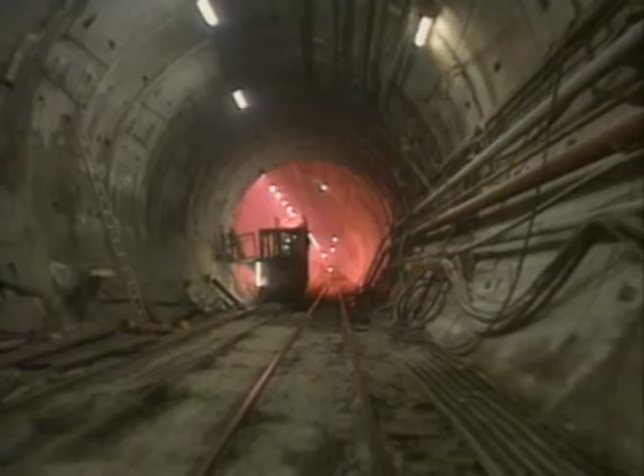Deep beneath the English Channel, one of the most ambitious engineering projects ever attempted is about to begin. Using Earth-eating robotic monsters, 13,000 workers are about to embark upon an epic quest to build the longest undersea railway tunnel in the world. This historic journey will push the limits of technology and human determination to the breaking point. Some workers will not survive. But the creation of the Eurotunnel is a story of triumph, one of this century's greatest superstructures.

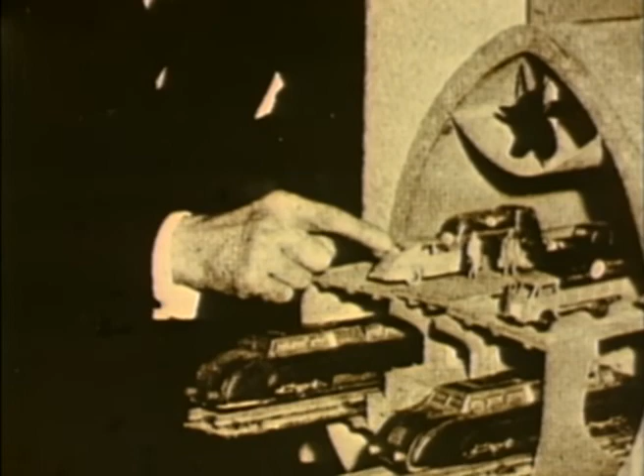Ever since the Ice Age ripped them apart 10,000 years ago, a small finger of ocean, the English Channel, has been the only path between England and Europe. Throughout history, countless lives have been lost trying to cross this treacherous body of water. For centuries, amateur designers and skilled engineers alike have tried and failed to create a safe, permanent link. The first channel tunnel design, if you can call it a design, was in 1802. But at that time, the technology was so limited that really it was science fiction.

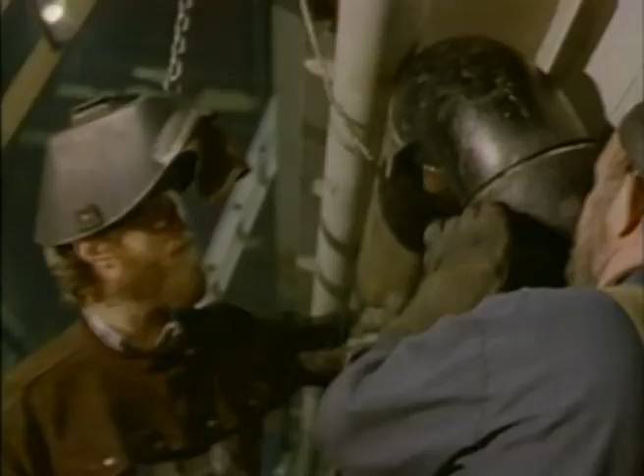But by the end of the 20th century, the line separating technology and science fiction is rapidly disappearing. It is now possible to create machines the size of large buildings, machines that can literally move mountains. Inside factories like these, engineers begin experimenting with space-age technologies to take humans into new and potentially dangerous territories. Soon, an age-old question is asked once more. Can a tunnel be created under the English Channel?

But does England herself even want such a passageway? From the days of Camelot to the age of Churchill, the Channel's cold, choppy waters formed an imposing barrier between the monarchy and its enemies. Would-be conquerors from Napoleon to Hitler developed plans of how they could first defeat the English Channel and then England itself. Ironically, during World War II, Adolf Hitler developed a plan to dig a tunnel near the captured French town of Calais, site of the modern-day French Eurotunnel station.

It was a threat the Allied forces took seriously. Bomber pilots were requested to report any plumes of grey material in the channel, and they actually established soldiers along the coast here with listening devices trying to detect any sounds of tunneling. But with the defeat of Germany in World War II, Europe entered a new era. The sounds of war were replaced by the sounds of commerce.

By 1986, one-time rivals England and France decide the Channel has become an economic barrier, an obstacle that must be eliminated. To achieve this, the French and British governments dedicate themselves to the task of building a modern marvel, the world's most technologically advanced undersea tunnel. Engineers and business people alike dream of high-speed rail trains traveling beneath the English Channel, carrying the citizens of a united Europe into newfound economic opportunity.

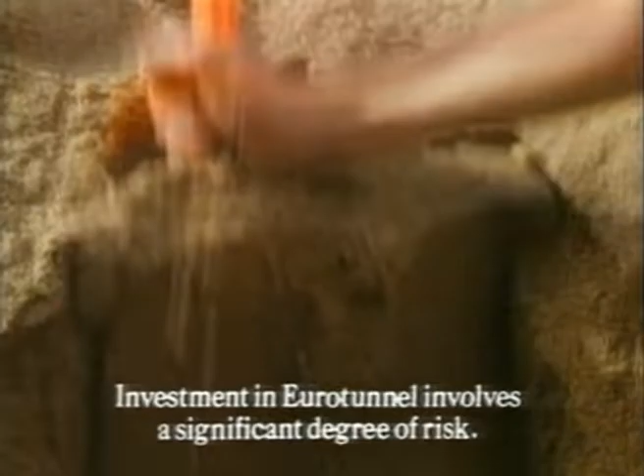For as long as we can all remember, people have dreamed of a channel tunnel. As this ad, seeking Eurotunnel investors, points out, the project was financed solely by private investment, with an original price tag of over $10 billion. This made it very different from other large engineering projects of this century, like New York City's Lincoln Tunnel, which was government-funded. Ultimately, Eurotunnel had to answer to its shareholders.

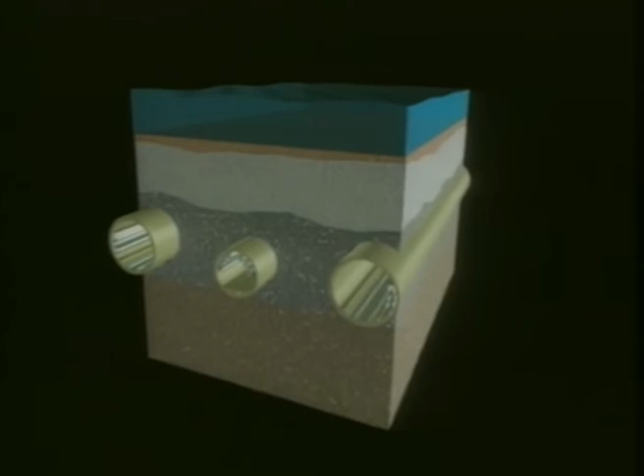But despite the private backing, there was much public opposition, especially on the British side. Some opponents were concerned about the environmental impact of the project, while others didn't want to surrender England's status as a proud island empire. The project's decision-making body, a consortium of 10 companies called Transmanche Limited, or TML, is undaunted. They plan a design of 3 parallel tube-like tunnels. When finished, these massive tunnels will form a railway loop between England and France.

Engineers envision a system that will carry thousands of passengers and hundreds of tons of freight each day on this circular 30-minute trip. Of the 35 miles between the French terminal at Calais and the British terminal at Folkestone, 24 will be undersea. No other project has ever attempted to tunnel this far in such a hostile environment. There are lots of problems, technical problems. How will a car move inside the tunnel? What kind of trucks can I transport? You know, all the variety of things.

As the project begins in late 1986, all of these questions remain. But before issues regarding the tunnel's operation can be addressed, the most daunting and obvious problem must first be solved. A machine that can chew through more than 30 miles of solid rock, hundreds of feet below the sea, doesn't exist. It will have to be created.

Thousands of miles from the English Channel, on the outskirts of Seattle, Washington, a solution is being forged of iron and steel. Here at the Robbins Company, a firm specializing in heavy mining and tunneling equipment, the next breed of super machines is being created. In this colossal factory is a mechanical beast that dwarfs its creators. It's called a tunnel boring machine, or TBM.

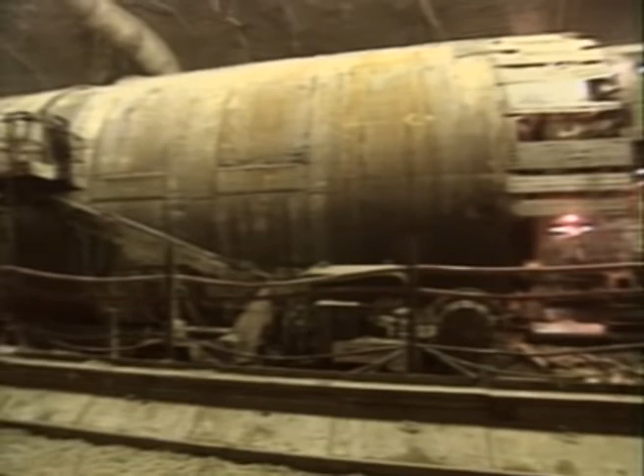When finished, this giant snake-like earth mover will be over 800 feet long and weigh over 1,500 tons. Its rotating head, almost 30 feet in diameter, consists of hundreds of cutting edges made from tungsten carbide, one of the hardest materials known to man. These will be the teeth of this mechanical monster, the cutting force it will use to chew through the earth below the channel.

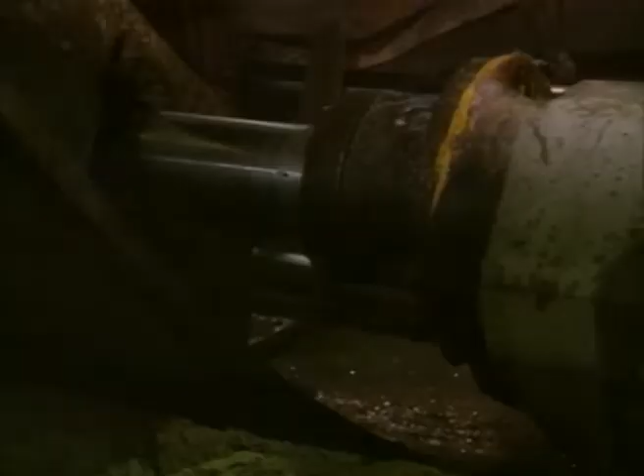Pushing the machine forward is a series of powerful hydraulic devices called rams, which will drive the cutting head through the rock. The millions of tons of excess rock it will dig up, called spoil, will be carried out on conveyor belts through the TBM service train attached to the cutting head. The challenge of carving tunnels through solid rock has always pushed the boundaries of our engineering and manufacturing skill. Even today, it requires a rare balance of brain and brawn.

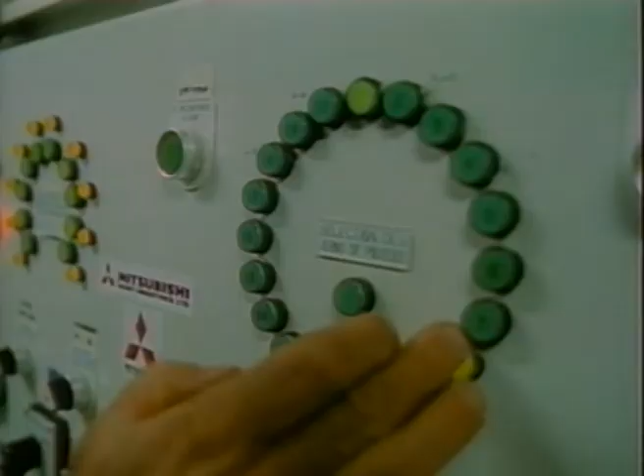When large-scale projects like the Los Angeles Aqueduct System were being created in the 1930s, tunneling technology was in its infancy. Today, the Robbins Company will replace blasts of dynamite with a computerized mechanical marvel of which the early pioneers could only dream. But the danger these modern miners face will also be unparalleled.

At its deepest point, the tunnel will be 246 feet below the seabed. During construction, if their boring efforts create a crack in the tunnel or cause a leak, the force of the incoming water will be equivalent to over 7,000 tons of falling weight. Man and machine would be crushed in an instant. At the Robbins Company, frightening scenarios like these must be addressed.

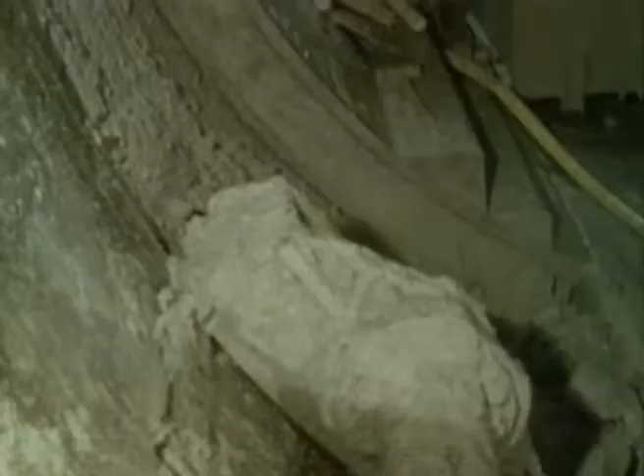Project organizers selected the tunnel's route precisely because it goes through a layer of chalk called marl, which is well suited to their tunneling efforts. It is also the last remnants of the original land bridge that once connected England and France over 10,000 years ago. While this chalk is ideal for tunneling on the British side, the situation on the French side of the channel is far more treacherous. Here, the seabed is riddled with faults and fissures, conditions that could lead to the deadly accidents engineers must try to prevent.

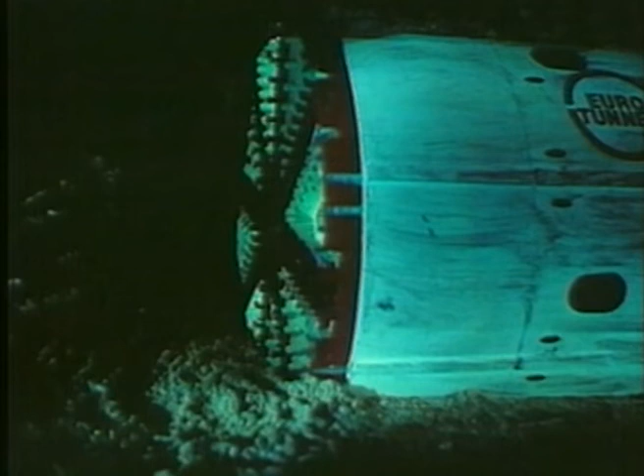Of the 11 TBMs that will be created for this mission, the machine that will be used on the French side faces the most difficult job. Working at greater depths, in parts of the seabed that are far less stable than the British side, this undersea giant will have to withstand pressures twice as intense as any tunneling machine has ever experienced. So engineers decide to create a special TBM that is part boring machine, part submarine. When finished, it will be able to withstand the same amount of undersea pressure as a World War II sub.

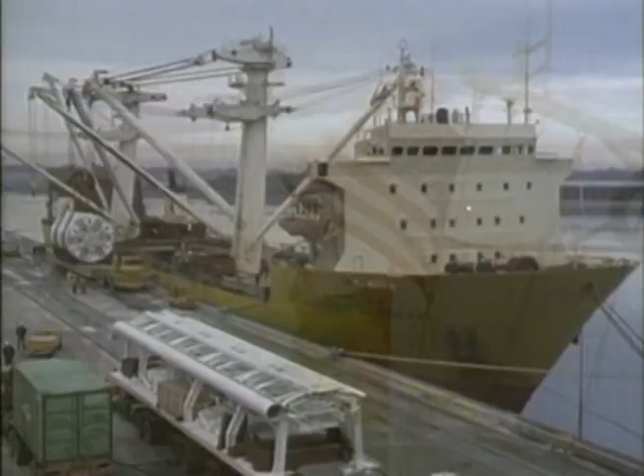Finally, the technology behind the dream of reuniting the European continent seems to be in place. And while the project will ultimately link England and France, the massive construction process will be an international effort. Companies from Germany to Japan will add their technologies to the mix, making the Eurotunnel a truly global undertaking. While this international force rallies to overcome the physical obstacles of the channel, there are other challenges already mounting. Namely, the race to complete the tunnel on time and on budget.

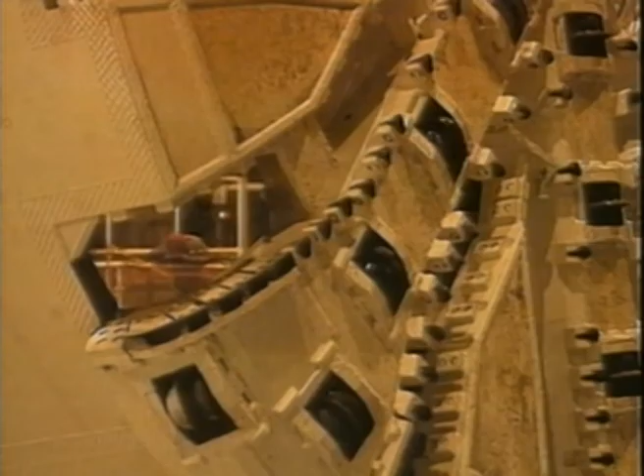It is now December 1987. This is where the Eurotunnel begins. Two huge shafts at Sangatte, France, and Shakespeare Cliff in England. Too enormous to be delivered to the site as complete machines, the first TBMs are lowered piece by piece into the darkness of the shafts 200 feet below. Going with them are the workers, the men behind the machines. They too are descending into the unknown, taking the first steps of an epic journey.

As the first work begins and the light of day slowly disappears, there is an air of hope, expectation, and much uncertainty. While extraordinary safety measures have been taken to protect the workers, it remains a dangerous world. And for some, the greatest civil engineering project of the 20th century will carry the ultimate price tag.

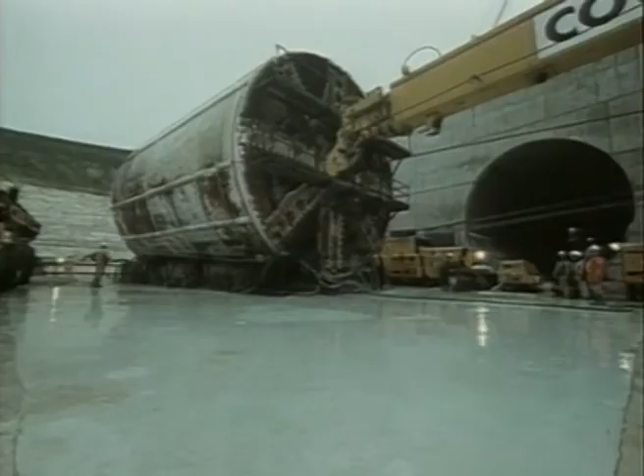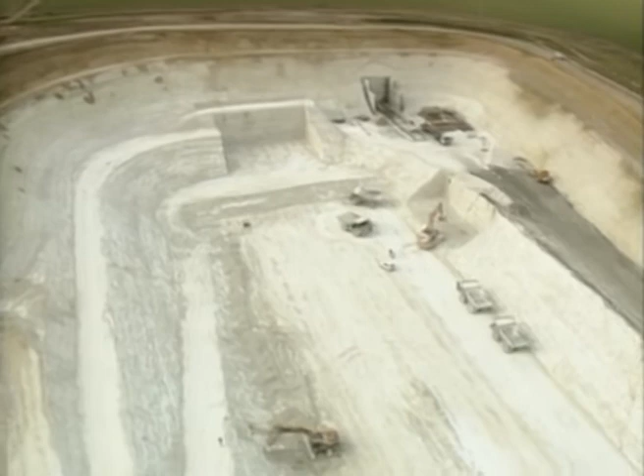As giant mechanical earth eaters are given a final check before being lowered to their work site hundreds of feet below the ground, one of this century's most ambitious engineering projects is underway. The creation of an undersea railway that will link England and France begins here in Sangatte, France, and here at Britain's Shakespeare Cliff, near the site of the future Folkestone Terminal. What officials hope will someday be the world's premier railway system is now just a hole beneath the earth. The race is on.

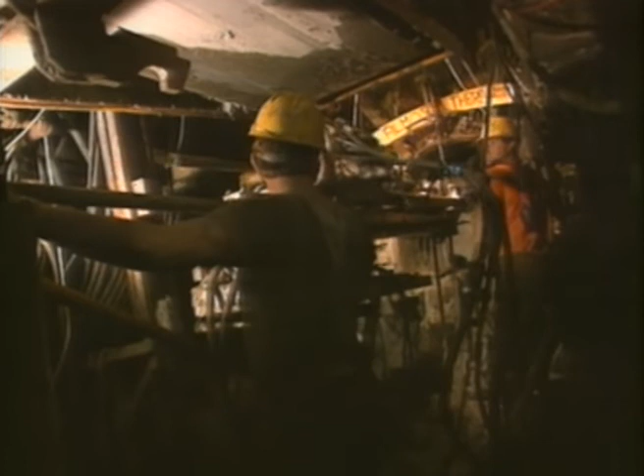Compounding the awesome challenge of the actual tunneling operation is a human challenge. British and French workers, once bitter rivals, must now learn to work together. Once they reach the dark and dangerous caverns deep below the earth, there can be no room for cultural misunderstandings.

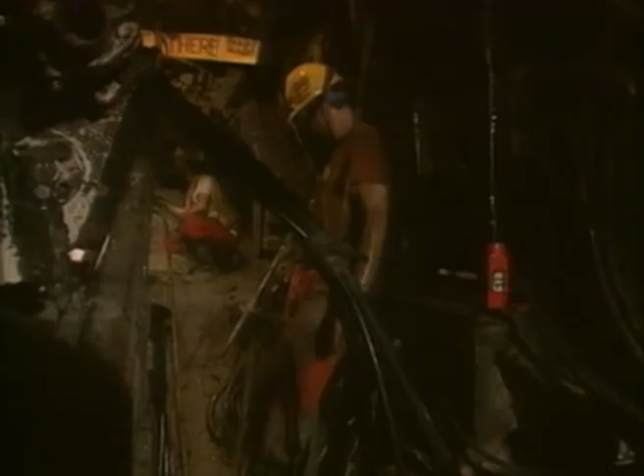A French engineer is trained to make a plan. They can't start work unless they can see what there is to be done, see where their task fits into the whole thing, and see how it's all going to be organized as it goes along. No such thing in the British culture. British culture is to sit down and say, now what have we got to do, chaps? And sort out who's going to do what and set to work.

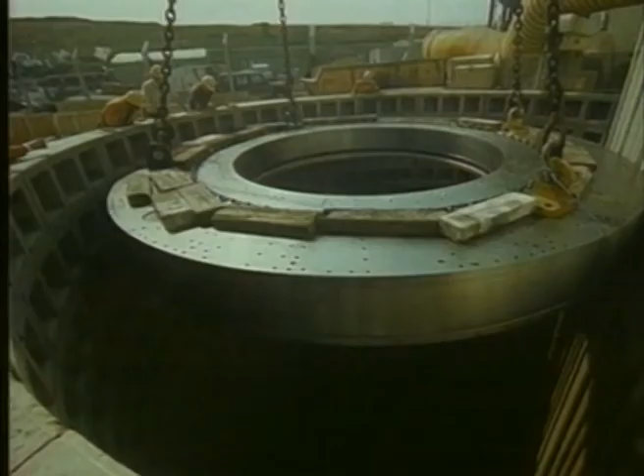One of the first problems they face is the assembly of the giant tunnel boring machines, which the workers christen the moles. Even the smallest machine takes months to build and costs several millions of dollars. The largest of these subterranean titans weighs 1,500 tons. Because of their enormous size and weight, the TBMs must be assembled on site, which in this case is far below the earth.

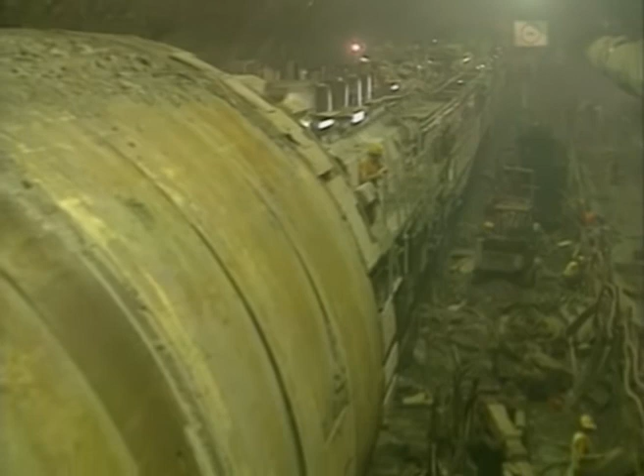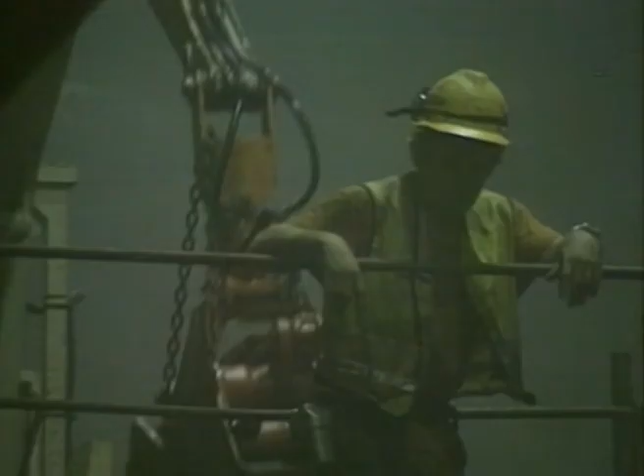The actual cutting head of the TBM is just the tip of its immense body. Attached to it is the service train, a multi-car train system that carries the hydraulic power to drive the TBMs forward. When connected to the cutting head, each service train is a staggering 850 feet long. One of the service train's main functions is to be a conduit for the removal of millions of tons of rock and sediment these mechanical moles will dig up.

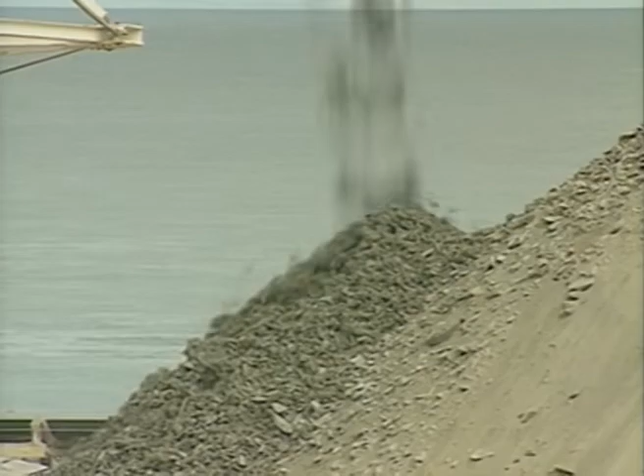The debris will be carried by conveyor belt through the service train to a supply train and back, and finally to disposal facilities in England and France. The removal of the spoil is a major challenge. When operating at full speed, engineers estimate the TBMs will cut through 750 feet of rock per day, removing 2,400 tons of waste per hour. When the project is finished, the total amount of rock removed would fill a major football stadium 13 times.

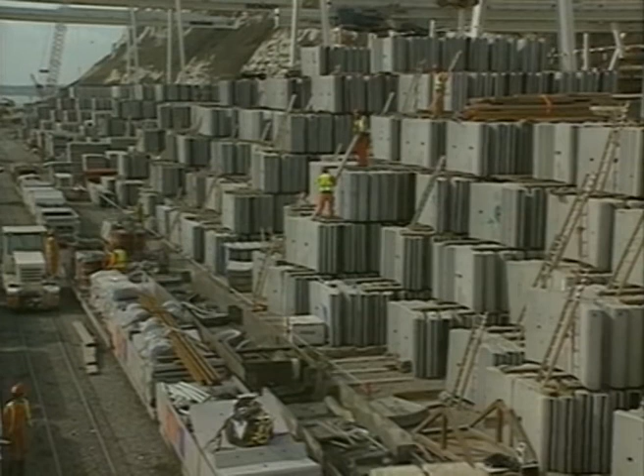But equally important as taking material out of the tunnel is the challenge of getting materials in. And one of the most crucial building blocks at this underground work site are the 500,000 concrete slabs which will line the tunnel walls. Because these concrete rings will provide a life-saving barrier between passengers and the churning English Channel above them, their construction is of utmost importance. Special factories are built in England and France to manufacture these vital sections.

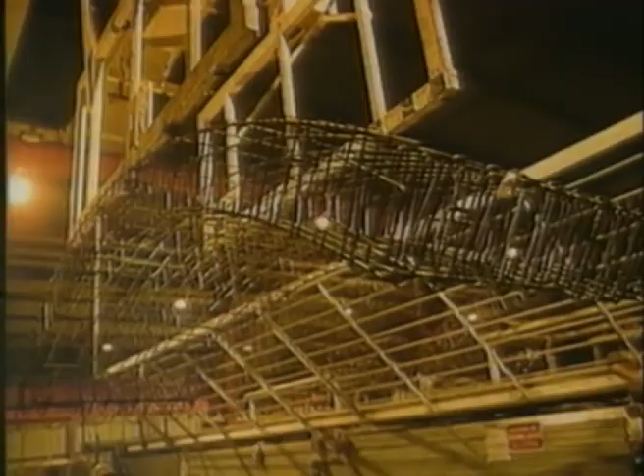Each ring is made of specially reinforced concrete, even stronger than the concrete used in nuclear power plants. It is also reinforced with a framework of steel rods for extra resistance. This is necessary because the savage ocean pressure that will bear down on the tunnel walls is equivalent to 12 atmospheres, or 12 times the pressure we feel on the surface. No human could survive under such immense force.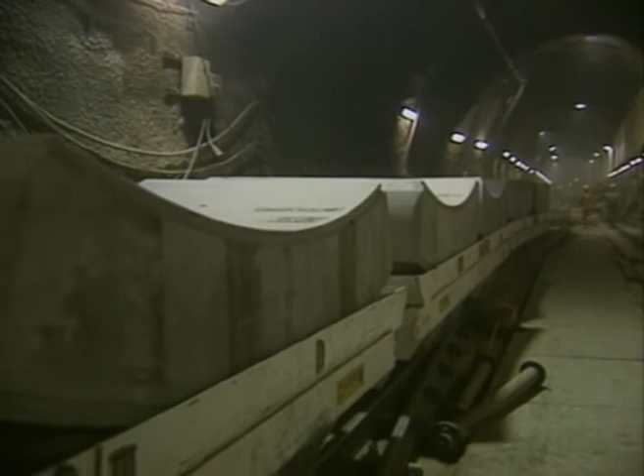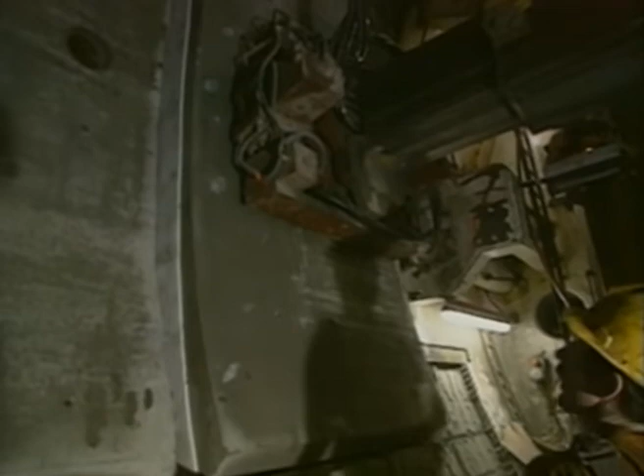Once the rings are finished, they are transported by narrow gauge railway to the TBMs in the tunnel and brought up through the service train. Then, a remarkable display of mechanical symphony takes place. As the spinning head of the machine claws its way through the rock, operators using giant cranes create the tunnel walls right behind them. After being fitted into place with incredible precision, a gap of only 3/4 of an inch remains between each section. This tiny space is then sealed with a cement grout, and another piece of the tunnel wall is complete. When finished, each ring of the tunnel will weigh 40 tons.

But just as the skeleton of the tunnel is beginning to take shape, the project suddenly seems in danger of falling apart. It is now 1988. The British and French teams are starting with the middle service tunnel, drilling towards each other to meet in the middle of the channel. But by May, the giant tunneling machines begin to break down.

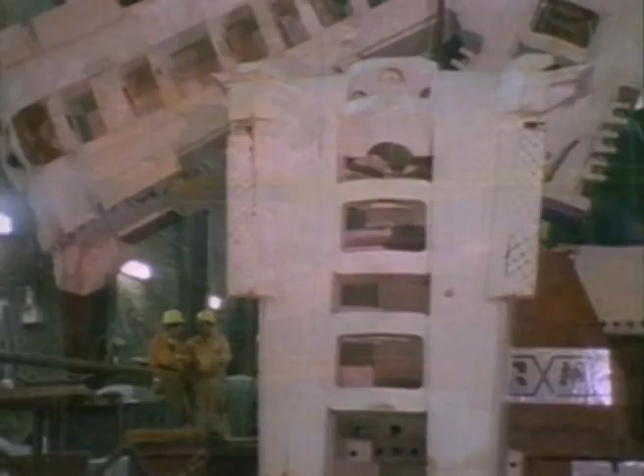It was designed to operate at pressures that no machine had ever operated before. It was strictly a prototype as a result of the fact that it was so complex and nothing like it had ever been built. It had all kinds of troubles. Practically everything important on the machine failed or broke at one time or another shortly after we installed the machine.

On the French side, the TBMs are encountering precisely the scenario engineers feared the most: hidden faults and fissures in the seabed. On the other side of these cracks lie the awesome forces of the English Channel. It was technically very difficult because of the water pressure that we had to work in. As the machine bored forward, it bored right through faults that were filled with seawater, connected directly to the ocean.

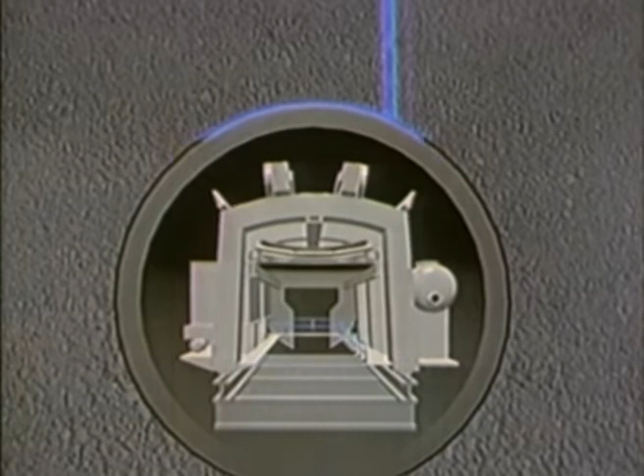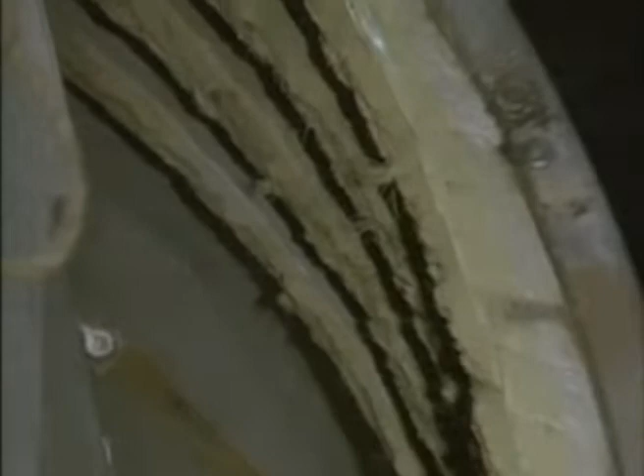Waterproofing measures designed to protect the TBM's delicate electronic equipment from the seawater fail, stopping the giant machine in its tracks. Then, as engineers scramble to repair the electrical problem, another even larger problem develops. This is the seal we intend to use. It's a wire brush type seal. The ring of watertight seals providing a life-saving barrier between the TBM and the tunnel walls also begin to fail. Again, victims of saltwater corrosion.

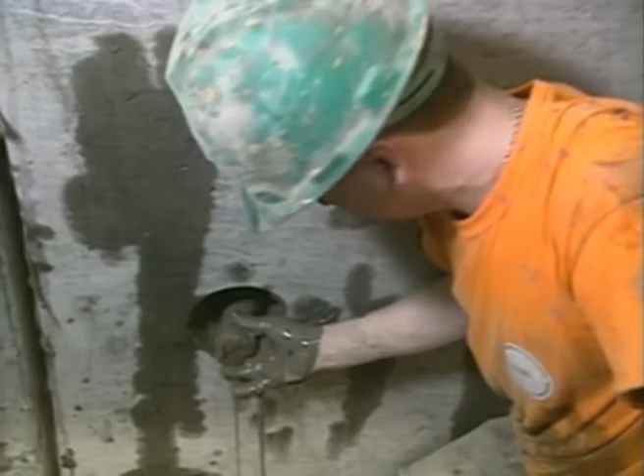Engineers need a solution, and fast. The corroded brush-like lining seals are replaced. Then, a mixture of paper and special grease is applied to the brushes. When this coating comes in contact with seawater, the paper particles expand and create a permanent, watertight bond between the segments. The TBM is once again waterproof.

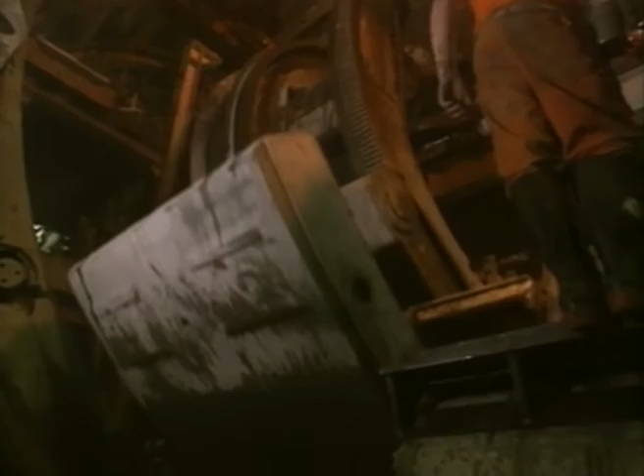But to Robbins Company President Richard Robbins, the tunnel wall seemed far more secure than the legal agreement he is working under. Soon he is forced into a desperate personal gamble. The French contractor knew that we had designed a prototype machine that we didn't really understand exactly what it was going to cost us to build. So he built into the job some interesting incentives that if we met certain project construction points along the tunnel by certain dates, we would earn bonuses. But it was so bad in the early stages that I was really almost betting the entire company that we would succeed. So it was a big risk for a small company like ours.

But it isn't just contractors like the Robbins Company who are gambling their future. Because the entire project is privately funded, Eurotunnel officials must hit their own deadlines to continue to receive funding. With each new delay, the entire fate of the Eurotunnel lies in the balance. The one thing we all understood was that if we stopped, it would be very hard to restart. The relationship with the banks, the problems with the contractors, the difficulties with the governments, or just plain organizational difficulties of whatever kind, would very probably bring an end to the project.

Finally, engineers are able to redesign the mechanical flaws in the French TBM and move ahead. But they are now 9 months behind schedule. To make up the time, both the British team and the French team must stay on course. But how will these mole-like machines, tunneling towards each other from opposite directions, maintain such a specific course? They are far too deep below the Earth for high-tech satellite mapping to be of any use. And even the slightest deviation in their course, a fraction of 1 degree, will mean they fail to meet up under the channel.

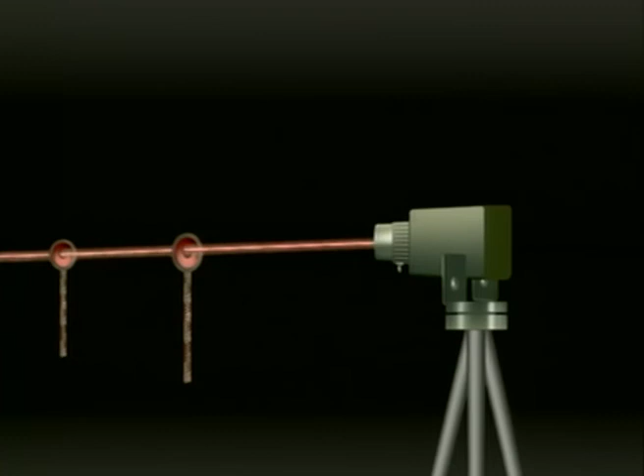To remain on track, tunnel engineers use a space-age laser beam guidance system. Here, a red laser emits a beam from behind the cutting head. As it sends a beam of light forward, it hits various control points fixed to the tunnel wall before striking a special target on the rear of the cutting head. These control points feed information provided from the laser straight into the machine's onboard computer. From the TBM control cabin, operators can now adjust the hydraulic rams that thrust the TBM forward and keep it precisely on the right course.

But even if the two machines do stay on course, the complex plan for after they meet has never been tried before. As the French and British TBMs tunnel towards each other, they will reach a designated point where they will stop.

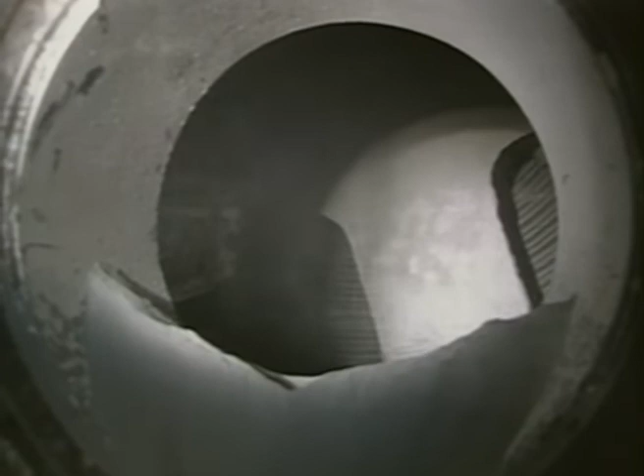They will now be a mere 100 yards apart. At that point, a long steel probe will be sent through to determine if they have been truly on course. If so, more conventional equipment will finish the relatively short distance that remains. But if the two machines are off course, it will mean yet another delay while engineers try and come up with a solution. And with the project's skyrocketing budget under fire, more delays could signal the end of the dream called Eurotunnel.

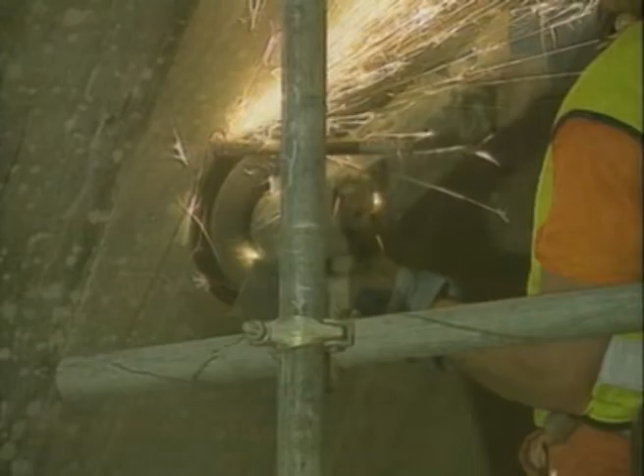1989. The year begins on a positive note at the Eurotunnel construction sites. The earlier problems with the French tunnel boring machines seem to be solved. One of the giant TBMs even sets a world tunneling record. For almost 3 years, work on the tunnel has progressed without a fatality. But in the first days of a new year, a time usually associated with hope and new beginnings, tragedy lies just around the corner.

On January 20th, in the dark recesses of this massive cavern, the tunnel claims its first victim. 19-year-old engineer's assistant Andrew McKenna is walking half a mile down the tunnel beside the narrow-gauge railway tracks used by the supply carts. Apparently failing to hear an oncoming train, he is suddenly crushed to death by a locomotive carrying spoil from the site.

Without warning, the stark reality of their dangerous jobs becomes clear to every worker. The tunnel has claimed one of their own. Even with 20th century technology, the job of building tunnels remains extremely hazardous. While workers cope with the loss, they also have to deal with other day-to-day fears brought on by the tunnel.

At the pumping stations, they actually went underneath the tunnels, and there would be like a little tunnel under the main tunnels, so the trains would be going above you, and you could be down working in 3 foot of water in a little cross passage with a blank wall with nowhere else to go, and that could be very claustrophobic. And we actually experienced people being sent in to work with us who found out they're claustrophobic.

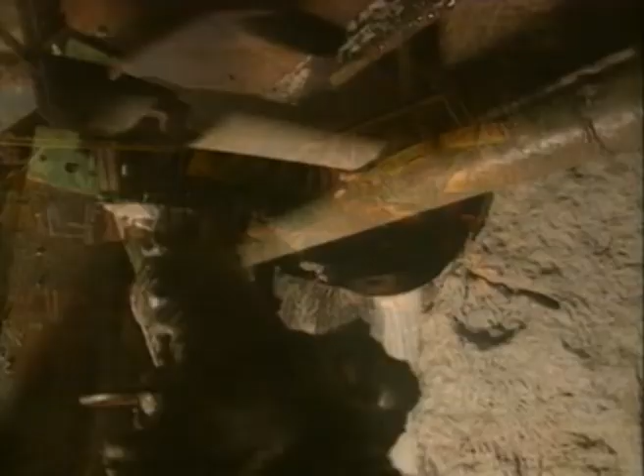And then it became a little bit scary because you had to say to them, look, you can't work with us down here, you're terrified of the situation, and you had to think of everybody else's safety. It was dark, it could be dusty, so you had to be able to cope and have a sort of positive outlook, really.

Even with the most rigid of safety standards, the death of Andrew McKenna will not be the last tunnel casualty. In all, 12 people will die in this historic and sometimes tragic undertaking. And while the mood of the workers has turned suddenly dark, the tunnel itself remains unchanged. Here, it is always dark. Workers who refer to their machines as moles are left wondering if they are the real underground creatures.

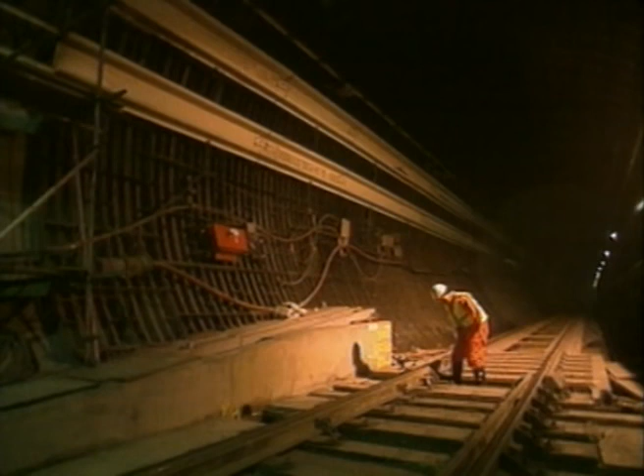You could be on a day shift where you arrived at work 5 o'clock in the morning and it was pitch black. You could go into a tunnel, work all day in darkness or semi-light, not bright, and then you come out at 5 o'clock at the end of your day and it was dark again. So you could go a whole week without seeing daylight. And that was a very weird experience because, you know, it's daytime and yet you never saw it.

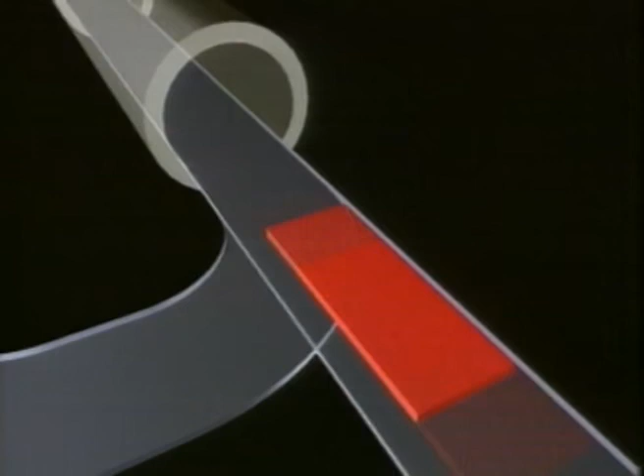As workers move forward in the darkness below ground, above them, work continues on the high-tech trains that will use the system when it's finished. The new service being created exclusively for the Eurotunnel is called Le Shuttle. Tunnel officials say the name is an example of the Anglo-French cooperation that characterizes the project. When finished, Le Shuttle trains will carry passengers in their cars on a continuous loop between the Folkestone terminal in England and the Calais terminal in France.

In plants like these, workers use more than 10,000 welds to mold more than 5,000 parts into the single shell of a train car. Each Le Shuttle train is being specially built for the frequent trips and heavy loads it will haul. To provide maximum power, a 132-ton locomotive is placed at each end of the train.

They have to be very special trains because the trains themselves are half a mile long and they have a lot of cars inside them or a lot of trucks, and therefore the locomotives have to be very powerful. They're the most powerful locomotives in the world. Each of these locomotives must be capable of pulling a 2,400-ton train by itself. For this kind of power, they will draw upon 25,000-volt electrical cables. This high-voltage energy source provides the equivalent force of a 7,600 horsepower engine, about 100 times the power of an average car.

While the shuttle trains have the most powerful locomotives on Earth, the sleek Eurostar trains have the world's fastest. The Eurostar passenger line uses the popular TGV trains, which will travel from Paris to London at speeds of 185 miles per hour. While in the tunnel, the trains will travel at more subdued speeds, approaching 100 miles per hour.

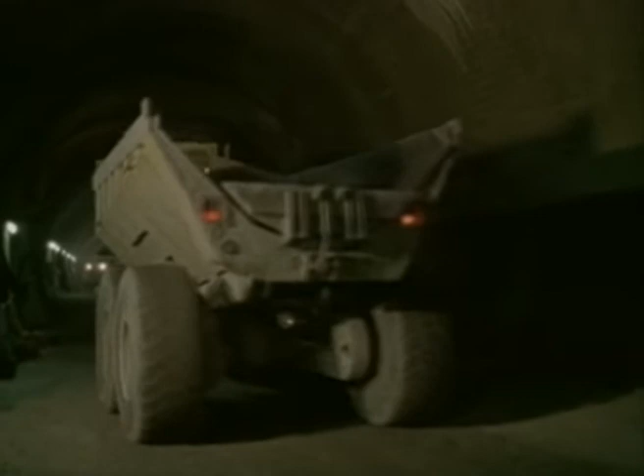It is now October 30th, 1990. There is a new feeling in the air today, a feeling of expectation. After 3 years of tunneling, the British and French TBMs digging the service tunnel, which will run between the two rail tunnels, have arrived at their undersea destination. Facing each other under the English Channel, 100 yards apart, the machines have stopped their digging. It is strangely quiet. The same question races through each worker's mind. Have they lined up?

A probe is sent through. There's a tense silence. Each worker at every level of the project knows it will be a catastrophe if the tunnels are off course. This would be the type of mistake that could fuel the flames of anti-tunnel sentiment into a raging fire. Finally, they get the news. The tunnels line up. England, by virtue of a 100-yard pole, is no longer an island.

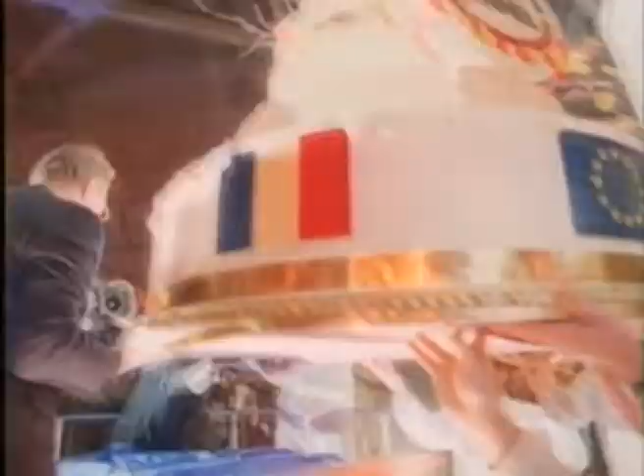After boring through 23 miles of solid rock, the tunnels are only off by 20 inches, well within the acceptable safety margin. It is a momentous achievement. While the project's workers, a unique collection of specialists from across the globe, revel in their victory, a celebration is quickly planned for the face-to-face breakthrough. Since there is still a 100-yard gap between England and France to close, it is decided that the official breakthrough of the service tunnel will take place on December 1st.

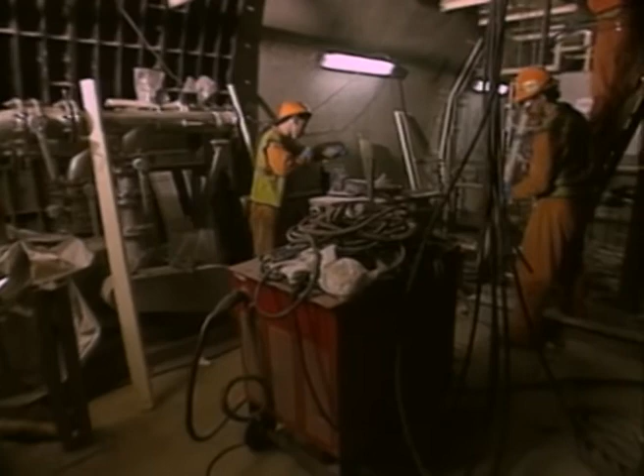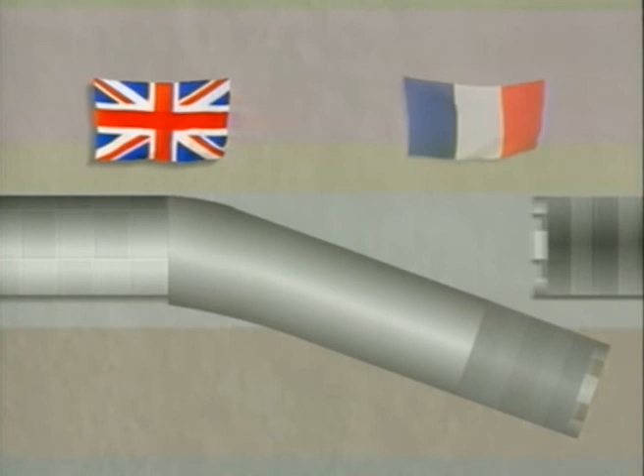As workers return to their jobs with a new sense of accomplishment, a lottery is held to pick one worker from each country to meet in the completed tunnel. Meanwhile, there is the problem of what to do about the last 100 yards. It is too expensive to retrieve both the French and the British machines, so a unique solution is developed. The British aim their machine downward and effectively commit mechanical suicide, burying the high-tech behemoth deep into the earth. This allows the French TBM to move forward and connect with the British side of the tunnel.

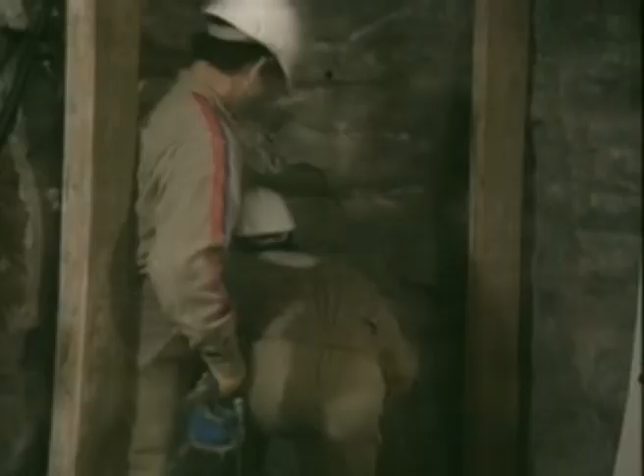December 1st, 1990. Finally, the moment of truth arrives. A thin layer of chalk, essentially a prop for this massive media event, is now all that separates Frenchman Philippe Cozette and Englishman Graham Fagg. With a couple of well-directed jackhammer blasts, a barrier that has stood for 10,000 years is gone. They're through. Hey! There's the handshake we've all been waiting for,

Mr. Fagg and Mr. Cozette. One of the most ambitious engineering efforts of the 20th century climaxes with a simple gesture of goodwill. Hundreds of feet below the English Channel, a Frenchman and an Englishman meet through a small hole. For the first time since glaciers ripped them apart thousands of years ago, France and England are once again linked.

The atmosphere was absolutely electric down there, not only just at the breakthrough but afterwards, and people were moving. We all felt European. I don't think anybody felt English or French. We were all European at the instant and for the brief hour before we could actually set off back to our respective sides. Amazing scene, really wouldn't have missed it for anything.

The next few months will hold many more extraordinary moments. The public gets their chance to share in history with the above-ground breakthroughs. First in France, and then in England.

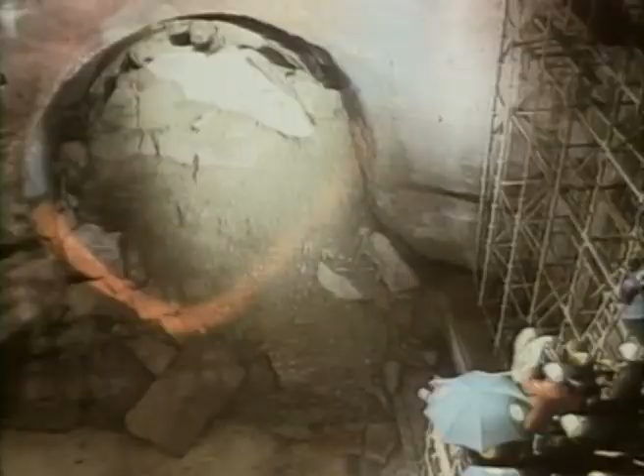When that tunnel broke through, there was a party that would end all parties. It practically went all night. It was at the Windsor Castle on the British side. Fireworks and feasting and about 1,000 guests, and it was really a marvelous party.

What I remember is sitting down there, having the feeling there is no more machinery running now, and a feeling in amongst the most tremendous uproar, popping champagne corks and backslapping and cheering and so on, a feeling of absolute silence. It was the most extraordinary feeling.

But amidst the revelry and the silence, the realization begins to sink in that there is still a long way to go. 2 more tunnels need to be created, not to mention the installation of the high-speed railway. Work on the Eurotunnel is far from over. As the parties celebrating the breakthrough of the service tunnel fade away, efforts to complete the 2 remaining tunnels resume at an energetic pace.

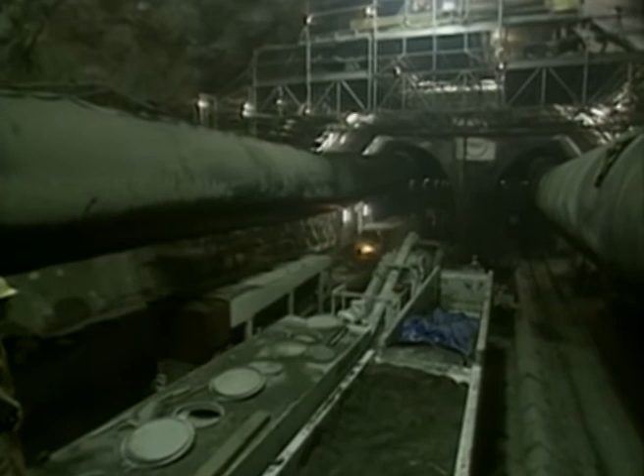The 2 main rail tunnels are called running tunnels. To allow trains to switch from one track to another, massive crossover caverns are carved from the seabed. 40 feet high and over 500 feet long, they are the largest undersea caverns ever created. Workers refer to these massive structures as cathedrals, but in the event of a deadly fire, they could quickly become a scene of mass terror.

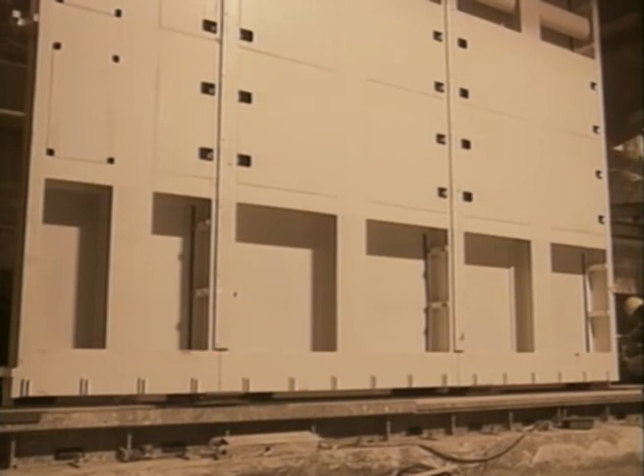To prevent fire from spreading from one running tunnel to the other, engineers build giant doors to separate the 2 tunnels. Each door is made from super strong carbon manganese steel. Then, a half-inch layer of flame-resistant material is added. These fireproof walls are a movable fortress, weighing over 100 tons each.

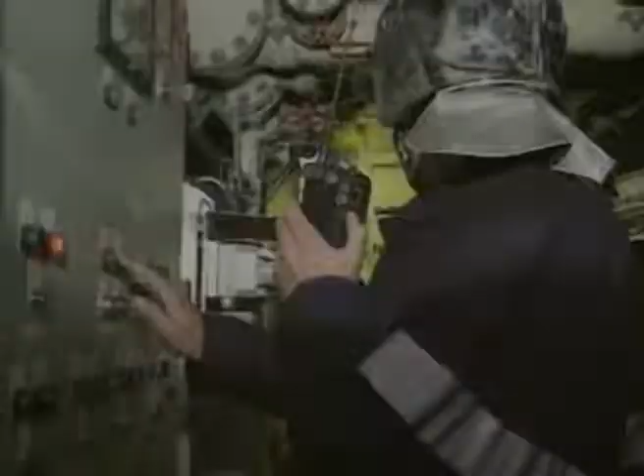But fire isn't the only emergency tunnel officials must prepare for. Terrorist attacks, bomb threats, and even the remote possibility of an earthquake are all scenarios which must be planned for. The evacuation train will be with us in approximately 6 minutes' time. Specially trained security force and evacuation teams are established that constantly rehearse emergency procedures.

While they speak the same language in times of emergency, French and British officials still have different beliefs regarding issues of safety. There are 2 different safety philosophies. The French have a belief in intelligent operators using sophisticated equipment, but in charge of the equipment. The British have a culture of fail-safe computers. Channel Tunnel, you've got an aggregation of both, so you can be quite sure whichever you think is better, the tunnel's got it.

No other tunnel in the world is as safe as this one, with the central service tunnel, the fire supply systems, duplication of power supplies, emergency walkways, and all the procedures that have been put in place to cover every eventuality. But there is one eventuality engineers haven't planned for.

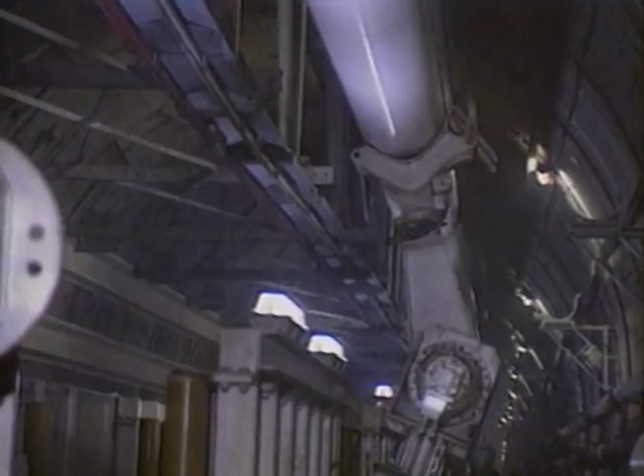As engineers perform test runs in the tunnels, the friction of the trains is producing an enormous amount of heat, raising temperatures to a scorching 140 degrees Fahrenheit. Scrambling for a solution, engineers create a pipeline filled with chilled, flowing water to keep the heat in the tunnel from accumulating. This cold water acts like a sponge to absorb the tunnel's heat. The water, now very warm, is then pumped to a cooling station on shore, re-chilled, and recirculated once again.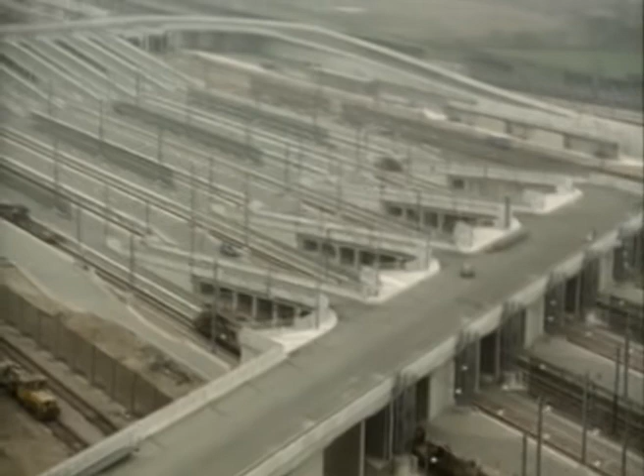Elsewhere, the 2 stations that will serve as Eurotunnel's passenger hubs are beginning to take shape. The massive French terminal at Calais is one of the largest construction projects in the world. Within its sprawling 11-mile perimeter, the Calais station will have 30 miles of roadway and 30 miles of railway track. While the British terminal at Folkestone is tiny in comparison, 5 times smaller than the French station, it will house the nerve center of the entire Eurotunnel system.

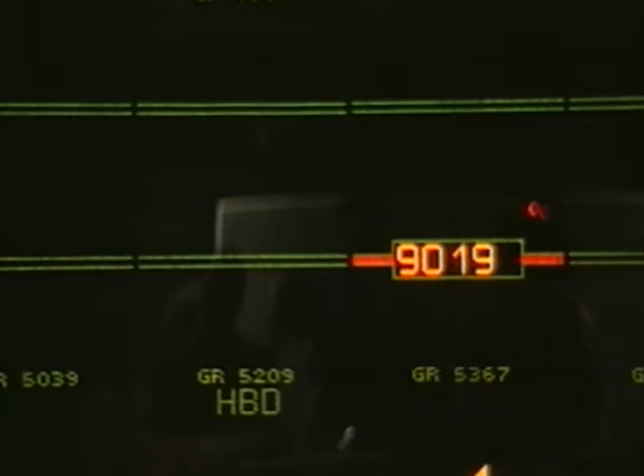Cross passage door 5650. You'll cross the opening. Stand by, please. Here in the Folkestone Command Center, operators use state-of-the-art technology to control all of the rail traffic that moves through the tunnel. Sitting behind 3 rows of desks, they can survey a curved wall showing the status of the entire system. This high-tech display is called a mimic board. It shows the position of every train in the tunnel and at the terminals.

Door clear, opening now. In the event of a power failure, tunnel control will immediately switch over to the Calais Control Center, which is staffed at all times in case of emergency. Even the drivers of the shuttle trains will receive a little high-tech help. In this driving simulator, operators practice navigating through the tunnel.

In real life, the driver of each shuttle will sit in the front locomotive, while the captain of the train sits in the rear locomotive. The captain, who is ultimately responsible for the safety of the passengers, communicates with the driver by intercom. But the onboard computers also have command status.

If the train begins to move too fast, the shuttle brakes will go on automatically. By the middle of 1991, the project's infrastructure is beginning to take form. From the terminals to the trains themselves, it is beginning to look like the dream of an undersea rail link will be realized. But deep underground, two more hurdles remain: the completion of the northern and southern rail tunnels.

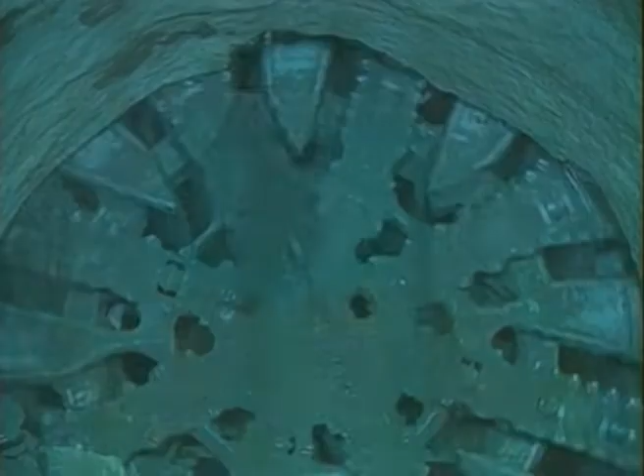On May 22nd, the first of those obstacles disappears into history as the Northern Running Tunnel is finished. This is the tunnel that will carry passengers from Britain to France, but today it is a symbol of a united Europe. Just over a month later, on June 28, 1991, more celebrations as a huge crowd gathers for the completion of the Southern Tunnel. The last TBM punches through the remaining wall and comes to a stop.

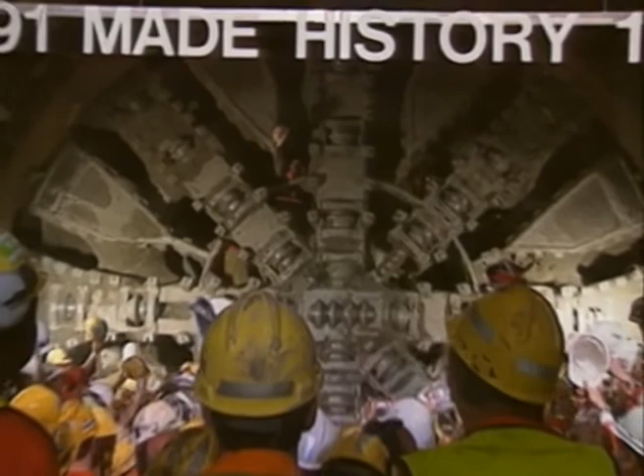4 years after the digging began, one of the most difficult engineering challenges in history is now complete. While workers celebrate and drink champagne, the machines finally fall silent. In the long, colorful history of these two countries, this is a singular moment. French or British, project chairman or supply cart driver, for a moment, it doesn't matter.

What is being created here and what has been achieved to date is of enormous value for the future of both our countries and of Europe. Thank you.

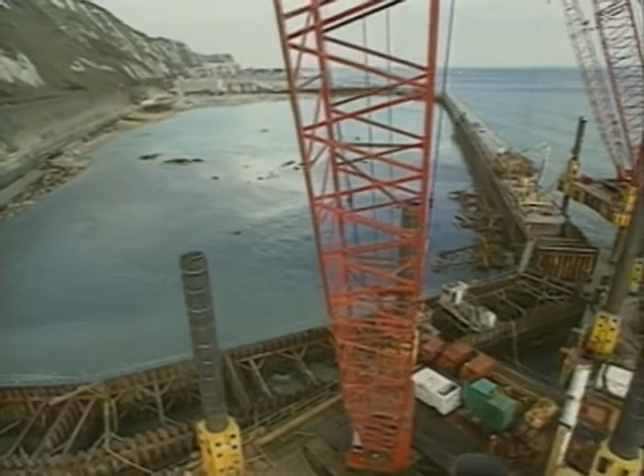In all, over 13,000 workers have labored for more than 6 years. Besides the 3 main undersea tunnels, each over 30 miles long, 9 other smaller access tunnels were also created. The amount of material removed on the British side increased Her Majesty's kingdom by 75 acres.

Engineers believe the hard part is over. In fact, contractors like Richard Robbins collect bonuses for finishing ahead of schedule. But when today's party is over, tomorrow morning will usher in the stark reality of a bloated budget and an uncertain future. To Eurotunnel officials, the hard part may have just begun.

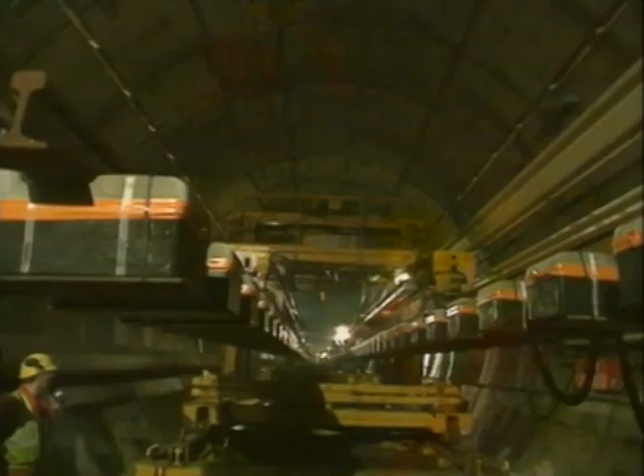With the digging of the Southern Railway Tunnel finished, the 7-year struggle to build the world's longest undersea tunnel nears completion. The narrow-gauge railway tracks which carried supplies into the tunnels are replaced by a new concrete floor. This will support the wider, standard-gauge railway tracks on which high-speed trains will travel at 100 miles per hour. Over 300,000 rubber shock absorbers are installed to secure 60 miles of track.

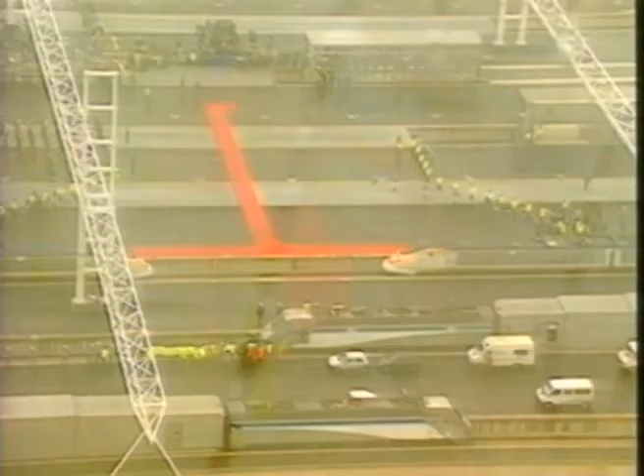The powerful locomotives that will pull trains half a mile long 20 times a day are delivered to the terminal at Calais, France. Finally, on May 6, 1994, the grand experiment is about to begin. After boarding one of the luxury Eurostar trains in London, Her Majesty Queen Elizabeth II arrives in Calais, France. This will be just the first part of an all-day celebration scheduled in both countries. Her Majesty is received by French President François Mitterrand.

After a ribbon-cutting ceremony, the Queen and the French President depart in Her Majesty's Rolls-Royce to travel on Le Shuttle back to England. The image is a powerful one. Not only are the former adversaries the Eurotunnel's ceremonial first passengers, they are also the public image of the new European, able to cross a once formidable barrier with grace and ease. Arriving back in England for the second phase of the ceremony, Her Majesty takes time to greet each crew member honored with making this historic inaugural journey.

But as the ceremonies and the media attention fade away, so does the public's interest. Initial usage of the tunnel is far below expectations. Critics of the Eurotunnel's costs, now almost $21 billion, are again on the warpath. Less than 2 years later, evening broadcasts spread the news officials feared the most. An accident has happened in the tunnel. On November 18, 1996, fire rips through a freight train bound for England, 11 miles from the French entrance.

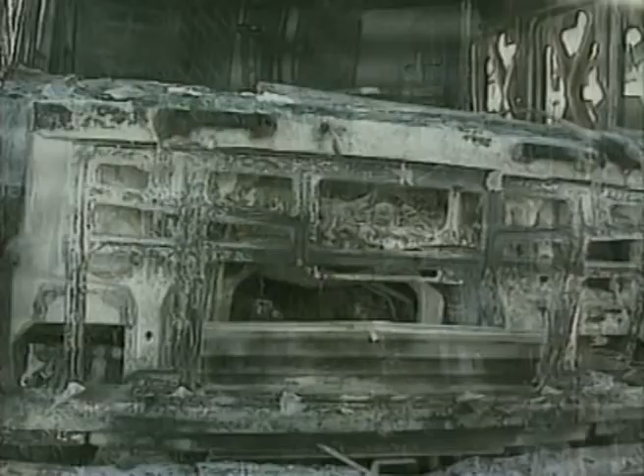Trapped in smothering fumes for nearly half an hour, passengers ignore requests to wait for help and abandon the train, groping their way to safety in the service tunnel. The fire is so hot, it transforms the cargo of mammoth trucks into unrecognizable lumps of melted steel. 8 of the 34 crew members suffer smoke inhalation, and the tunnel is badly damaged. What has been called the safest tunnel in the world is now brought to its knees. Amid a firestorm of public controversy, the Eurotunnel is closed.

1,500 feet of railroad track and 150 feet of the tunnel's concrete lining are wrecked and need to be replaced. The damage caused by this accident, estimated at almost $100 million, makes it one of the costliest rail accidents in history. While no one was seriously injured, public confidence in the tunnel plummets.

Eurotunnel officials go on the defensive. 12 hours later, nobody was in hospital. Yet there'd been a 1,500 degree centigrade fire 300 feet away from them. Nobody was in hospital. Now say that about a highway crash, or about a ferry sinking, or about a plane crash. You can't.

17 days later, Eurotunnel officials stage an emergency evacuation exercise designed to reassure the public the tunnel is safe. A drill critics say has more to do with public relations than public safety.

Despite this disaster, the northern tunnel reopens to passenger traffic several weeks later. But the badly burned section of the southern rail tunnel is closed for 6 months while the damaged tracks are repaired. Finally, commercial freight traffic resumes on June 15th, almost 7 months after the accident. As this disaster fades from the headlines, memories of the accident slowly fade with it.

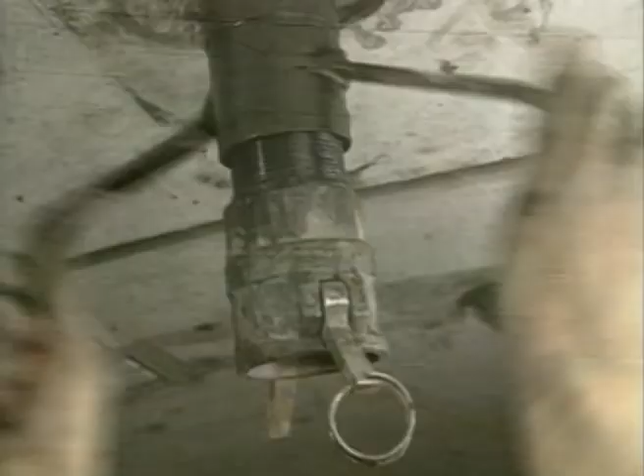But what hasn't gone away is the sacrifice made by over 13,000 men and women who created this architectural marvel. This plaque at England's Shakespeare Cliff pays tribute to the 12 workers who lost their lives working to create the Eurotunnel. Theirs was the ultimate sacrifice.

But thousands of workers also gave a great portion of their lives to work far below the earth, cut off from their families and the rest of the world. My son was 1 when I started on it, and when I finished he was 6. Now I do feel I missed a major part of his growing up by being on the tunnel.

The job of being a tunneler, of staring at a mountain or ocean and seeing a way to cross it, has always required a special type of person. A person who can exist without natural light, in suffocating holes, working for long periods of time towards a seemingly impossible goal.

Tunnelers are a special breed of people. They move around the world building holes in the ground. Most of their work is never seen by anybody else, but they do take a pride in building a good tunnel.

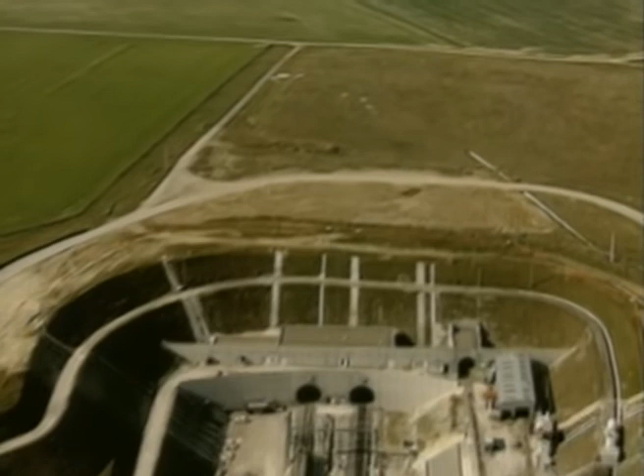It remains to be seen whether or not the Eurotunnel will be a financial success. But officials say immediate financial return was not the sole concern of every investor. The philosophy of the investors was not, curiously, mostly financial. They said it doesn't matter whether we don't see any return. We think the benefits for our children, our grandchildren, are going to be extremely important.

The Folkestone Terminal in England and the Calais Terminal in France are now ports of call to thousands of travelers. This undersea journey, for centuries the subject of scorn and ridicule, now seems routine, the shortest distance between 2 points.

If you were British and you lived here, we're an island, and if you want to get off this island, in the past, the only way is either to get on a boat or to fly. And for the first time ever now, you can take a train. You don't have to change, you don't have to get off. You get on the train in central London, and you get off, and you're suddenly in central Paris, and it's a whole new culture.

Whatever brings these travelers to England or France, the size of the world they lived in before the Eurotunnel is smaller now. A physical barrier that has stood for 10,000 years is gone.

Europe is already more united. Whatever the political structures, whatever the legislative structures, the economic and social coming together is unstoppable. And it's happening, and the tunnel plays a key part in that, and is symbolic of it.

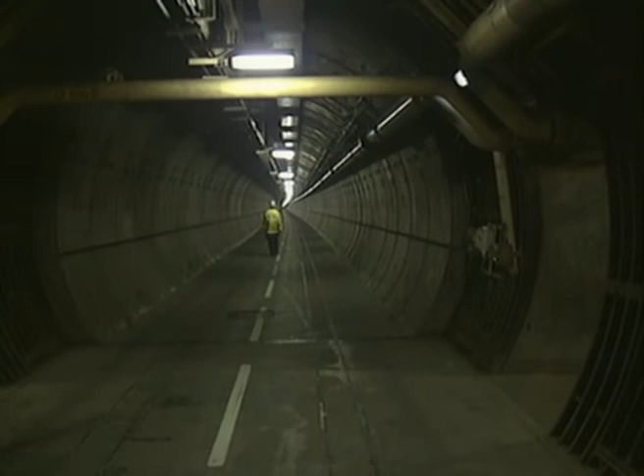Having lived with it for the last 10, 12 years, I feel something special about it every time I come in. I'm quite amazed by the amount of work that went into the tunnel, the complexity of all the equipment, and the short time that it took to build this modern wonder of the world.

In the end, the Eurotunnel may be viewed as more of a bridge than a tunnel. As these high-tech trains speed beneath the ocean, crossing cultural barriers as they go, the free exchange of new ideas they carry with them will remain their most precious passenger.